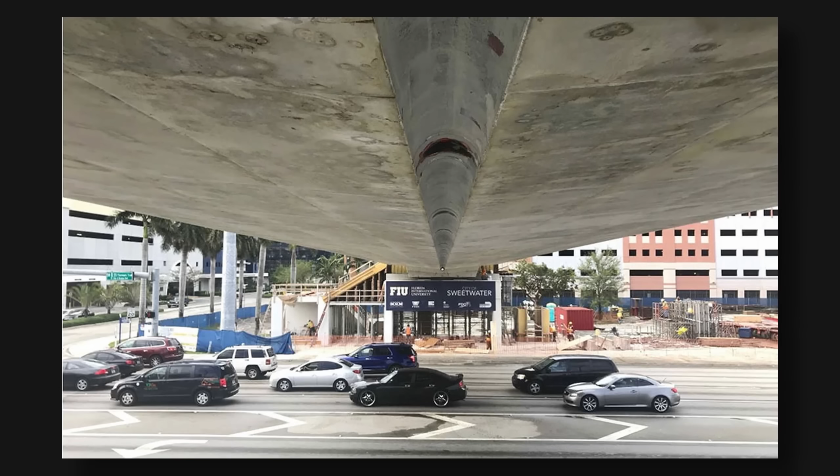In 2018, when rushing to install the FIU pedestrian bridge, improper calculations, project crunch to meet urgent deadlines, and gross negligence toward glaring red flags led to a clearly preventable tragedy that claimed innocent lives.

It was a busy March afternoon in 2018 at the intersection of Southwest 8th and East Campus Circle in Miami, Florida. Southwest 8th Street is an 8-lane thoroughfare on the north side of FIU, Florida International University's main campus.

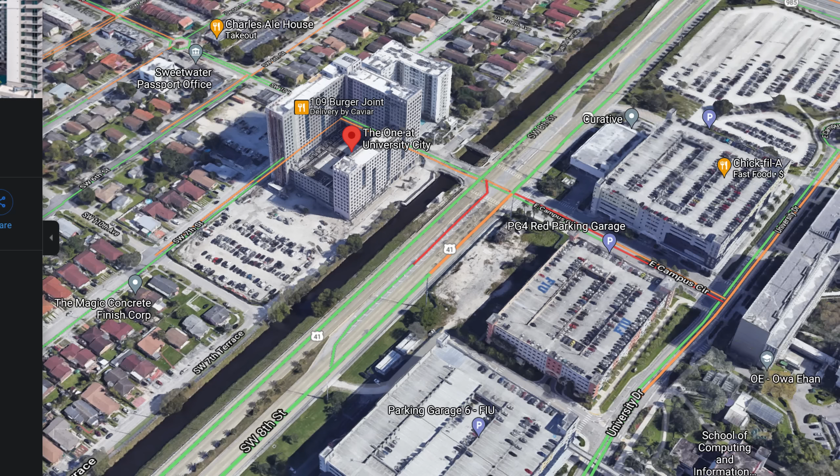This particular area was slightly congested in recent weeks, owing to construction of FIU and Sweetwater's new pedestrian overpass that would bridge the campus and the suburb of Sweetwater near 3 main parking garages on the FIU side, connecting near the newly implemented University City off-campus housing under construction just on the north side.

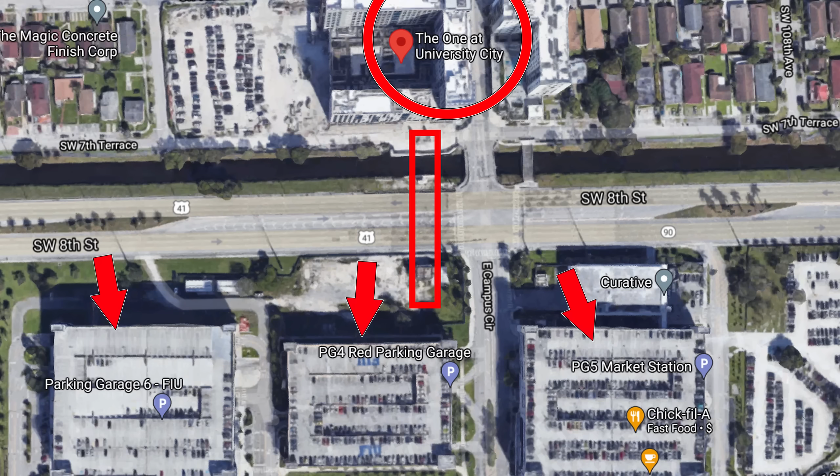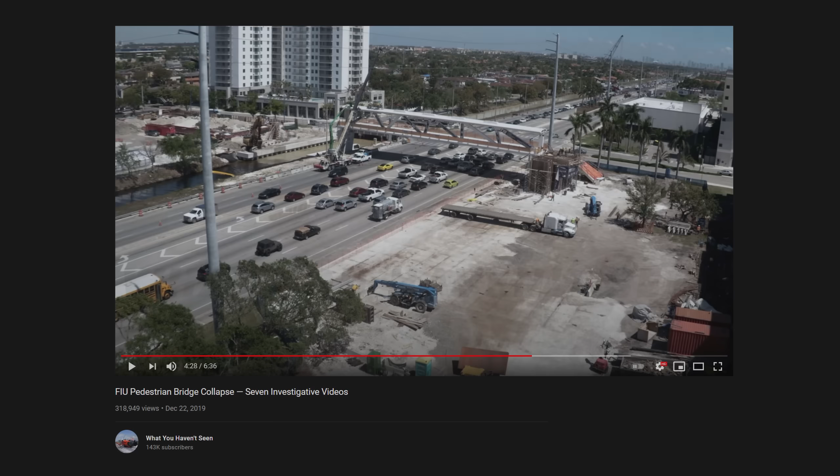The pedestrian bridge would allow campus-bound students to cross 8 lanes of traffic and the nearby canal safely and with relative ease. Also apparent was that this overpass would be a significant source of pride for FIU, Sweetwater, and their partners, evident by its truly unique design, artistic influences, and bold promotional campaigns, especially since the university is home to the acclaimed Engineering School of Construction, and specifically FIU's Accelerated Bridge Construction, or ABC, program.

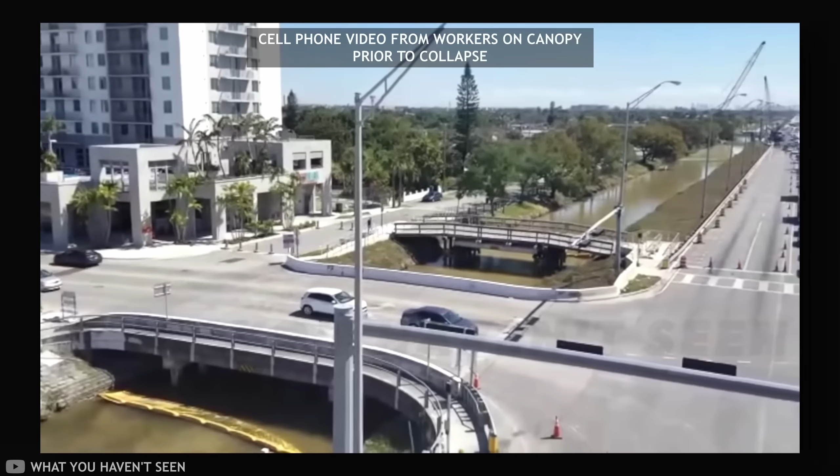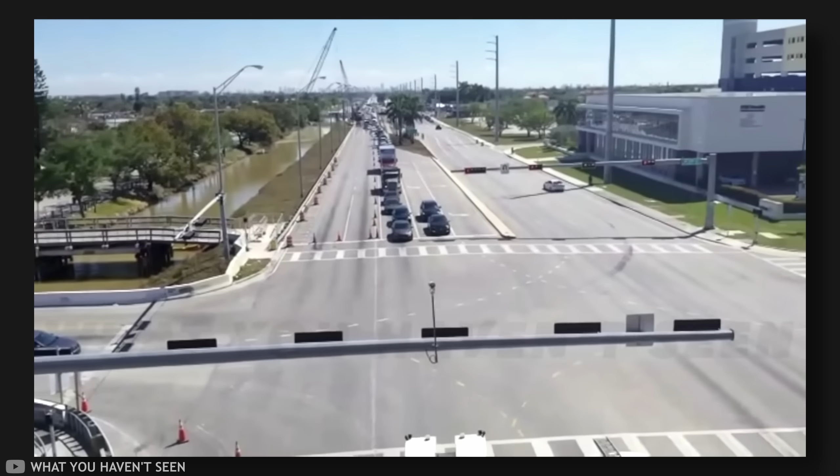Under construction but not entirely impeding traffic on Southwest 8th, the FIU pedestrian bridge project had reached a point where only 2 lanes needed to be closed for its continued work. On Thursday, March 15, 2018, at roughly 1:45 p.m., the bridge suddenly collapsed.

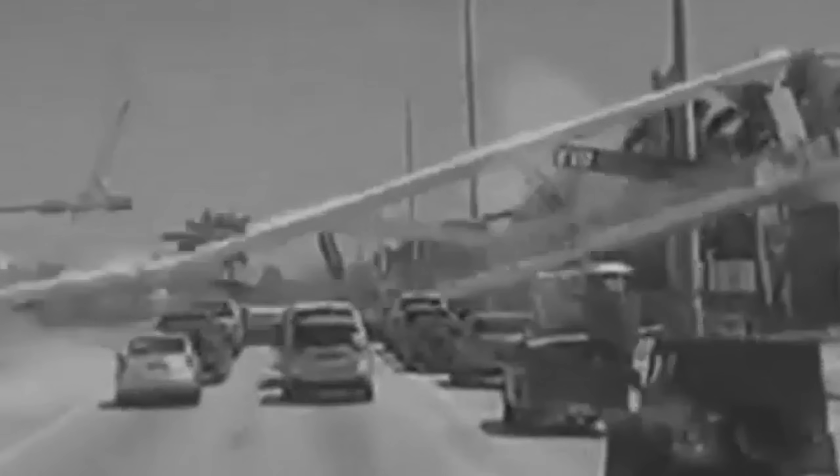Along with the 8 vehicles that it impacted, a small crew of workers had been present atop the canopy of the structure as well. This catastrophe injured 10 and claimed the lives of 6 - 5 of which were in occupied vehicles underneath, and 1 of the workers.

Ultimately designed to be a concrete truss-supported, asymmetrical cable-stayed or suspension bridge in appearance, the idea itself underwent many ups and downs over the years due to budget issues.

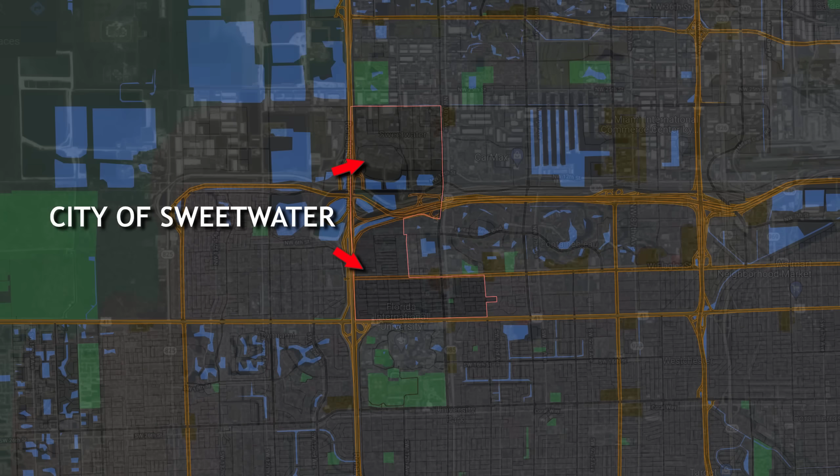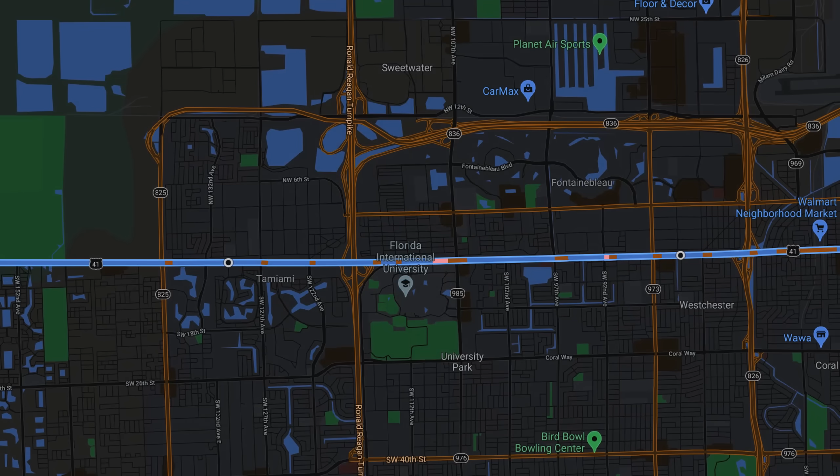The suburban city of Sweetwater, home to much of FIU's off-campus housing, is flanked by university locations - the College of Engineering to the east-northeast, the main campus directly to the south. The 8-lane Southwest 8th Street cuts right between the two and is actually Old Highway 41, the main surface road directly into and out of downtown Miami.

The volume of pedestrians needing to cross has been a well-known safety hazard for years, including 18-year-old Alexis Dale, who moved from San Diego that summer to attend the university. Sadly, one day before the beginning of school, she was fatally struck as she was crossing 8th Street and Southwest 109th Avenue early Sunday morning.

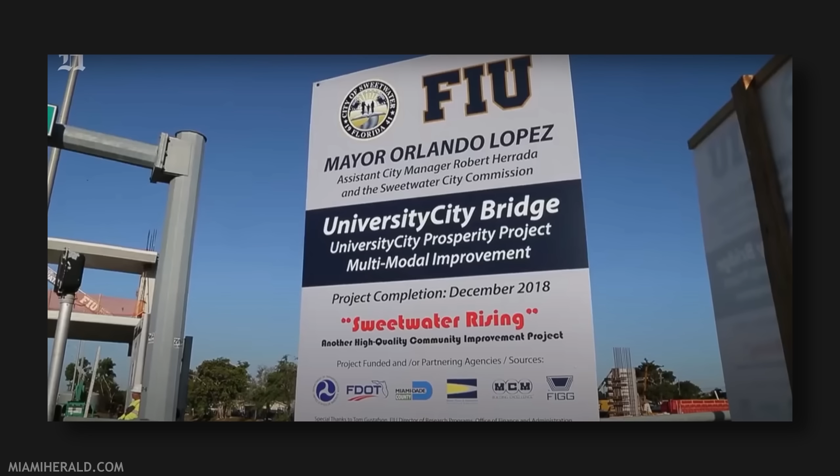Through a partnership between FIU, the City of Sweetwater, FIGG Group, and Munilla Construction Management, or MCM, the design, control, and sign-off would ultimately be down to the Florida Department of Transportation, or FDOT.

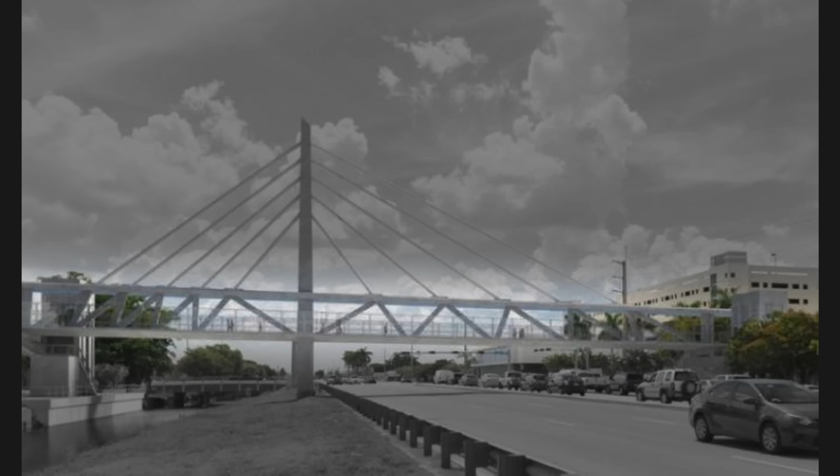This bridge was to be a 2-span, covered, non-redundant, concrete truss in its load-bearing structure, with a decorative tower above reaching down onto the roof portion, with ornamental steel pipe stays emulating the look of a cable-stayed or suspension bridge.

Asymmetrical and complex designs, though, in load-bearing structures like these are challenging and require the utmost professionalism in engineering and calculations. At a cost of roughly $12 million, the total length was 320 feet, including the stairs and landings at each end.

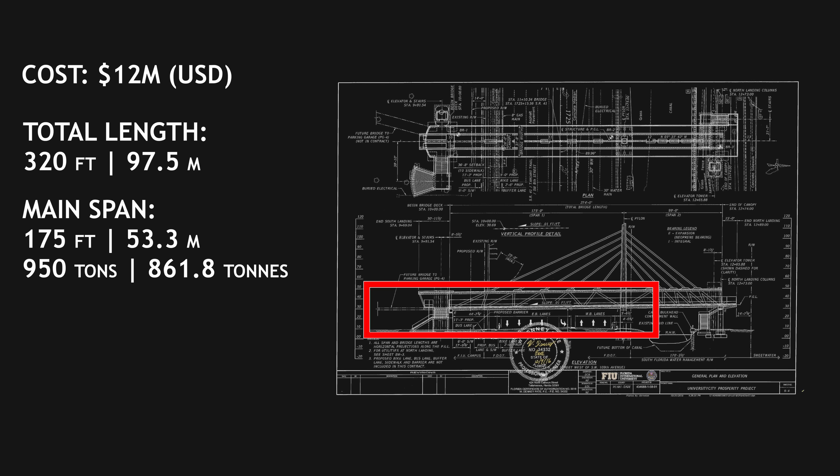The main span would weigh in at 950 tons and be 175 feet in length, to accommodate 5 eastbound lanes and 3 westbound lanes, with a walkway proposed for a later separate addition leading directly into the PG4 red parking garage on the FIU side.

Previously 11 feet shorter, a design revision in October of 2016, requested by FDOT, brought it to this length, requiring that a future eastbound bus lane be accommodated as well.

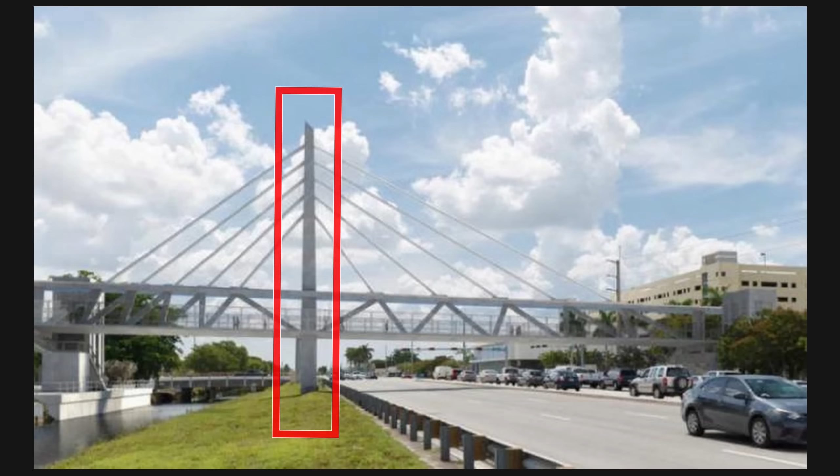The second span over the canal would be 99 feet in length, and the tower would stand at 109 feet, directly above the berm between the canal and Southwest 8th. Munilla Construction Management, or MCM, would be the primary contractor on site for construction work.

Now, important to note here is just how unique all of this was, and that's not just opinion - this was overt and intentional in the bridge's design. While concrete box girders have become increasingly common, up until recent years the concrete or composite truss bridge was extremely rare, trusses having almost exclusively been composed of steel in the past.

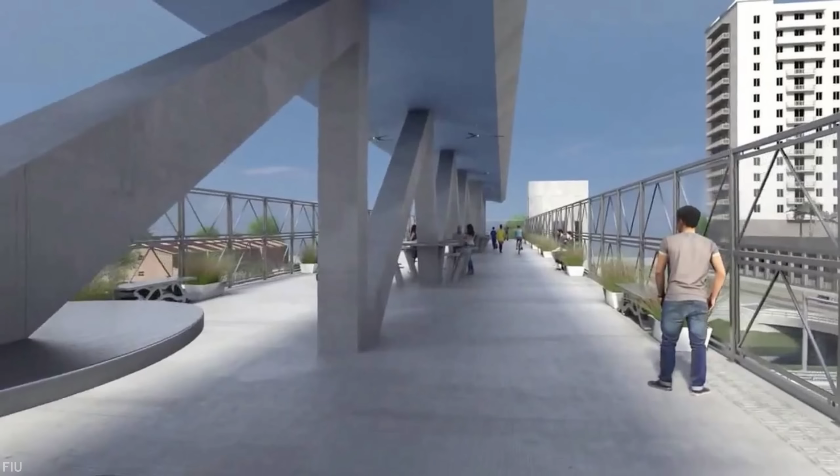The single, non-redundant, centered line of trusses, along with such a heavy canopy, were also somewhat unique. However, it was the faux cable-stayed tower as decoration that raised the most eyebrows in architecture and engineering communities, as this would be a massive amount of additional static load for the sake of aesthetics alone - practically unheard of in the world of bridge engineering at this magnitude for purely aesthetic purposes.

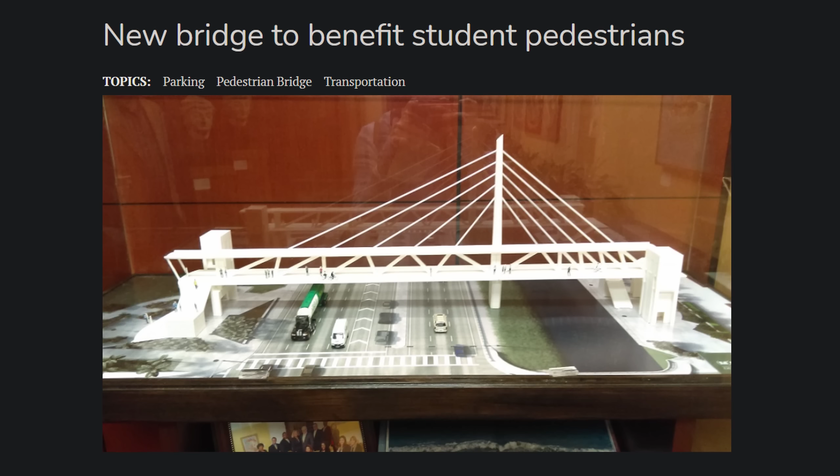Not impossible, but again, very complex and requiring the utmost professionalism in planning and design. Indeed, FIGG Group makes this the pillar of their work, something that has drawn so many customers in.

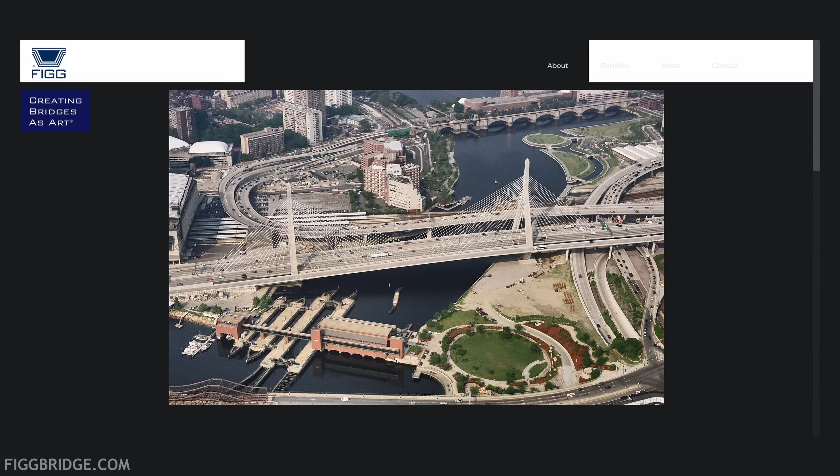Bridges as art, they call it. The concrete would be composed of the up-and-coming self-cleaning composite material that we're seeing more and more of lately, along with rebar reinforcement. This self-cleaning material is meant to keep the bridge looking fresh and new, preventing it from taking on the typical dingy gray color seen in so many older bridges.

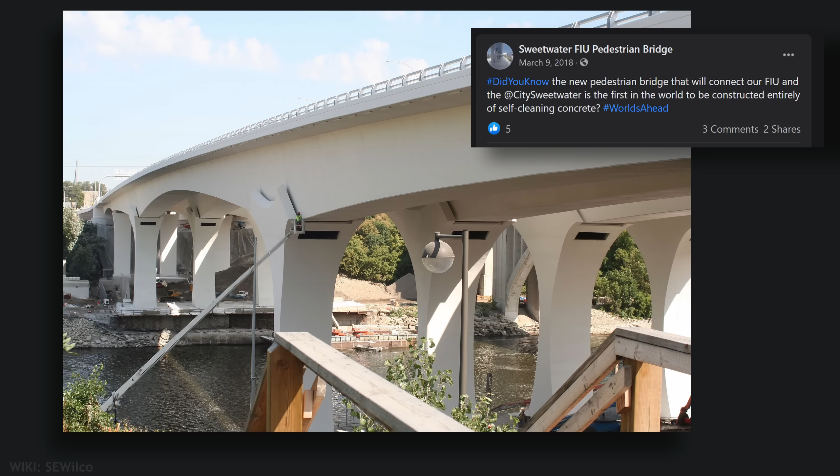Since load-bearing was fully dependent on concrete truss members, this new self-cleaning composite would be the primary structural element, aided only by rebar, and would no doubt be put to the test here.

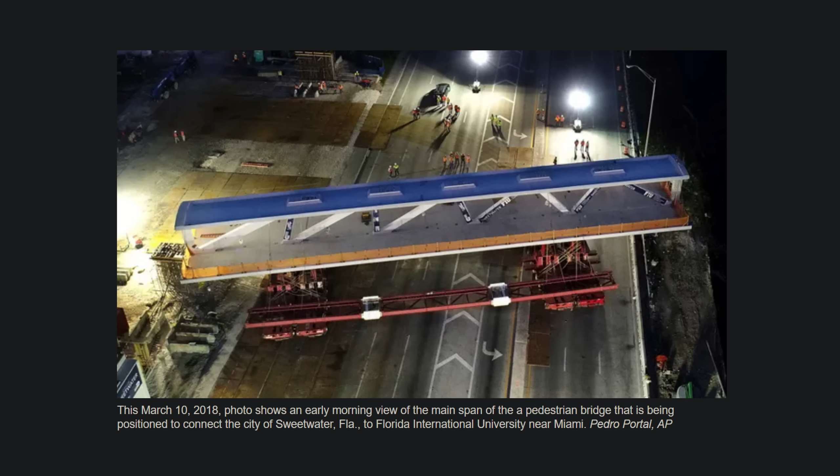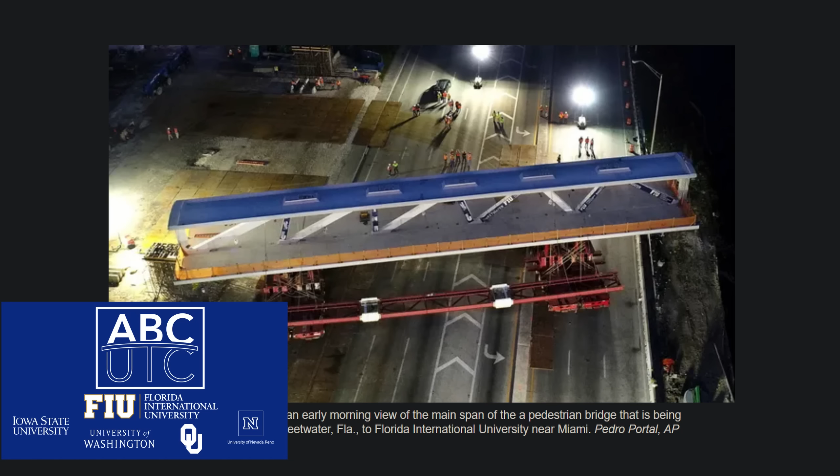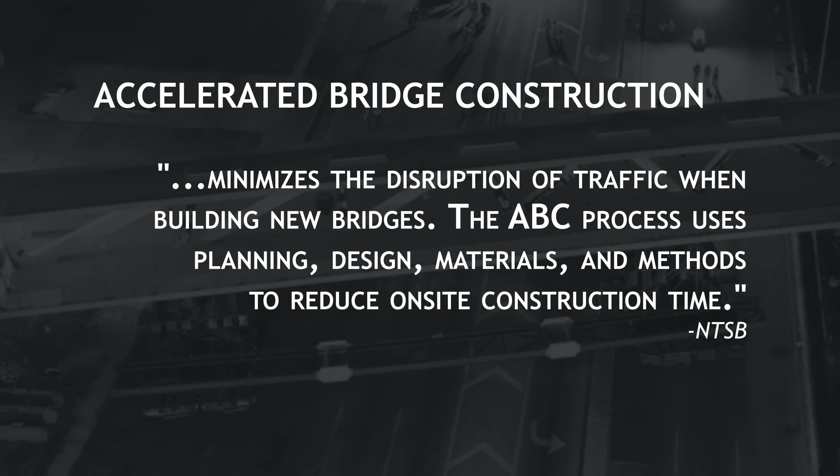Finally, the main span would be assembled and transported into place under the Accelerated Bridge Construction Program, or ABC, a program that FIU prides itself on, even to this day. This meant via this revolutionary ABC program and its innovations, the process would seek to minimize the disruption of traffic when building new bridges. The ABC process uses planning, design, materials, and methods to reduce on-site construction time.

It's safe to say that with the volume and frequency of pedestrians crossing such a busy street, it begs the question, why has this not been more of a priority in general for the local municipalities here?

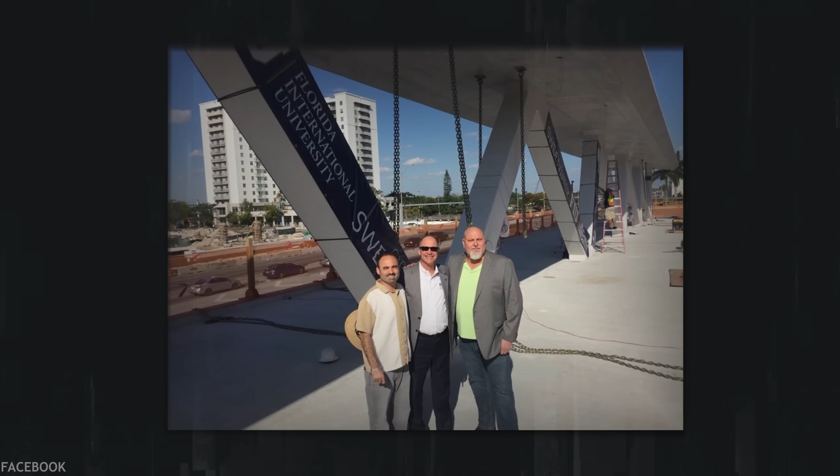As with most disasters of this type, it's rare a single cause or single party is to blame, and this particular collapse, in fact, served as a stark example in a chain of failures and the arrogance of groupthink, modern times and current year argument being no exception, and providing no immunity to this fallacy.

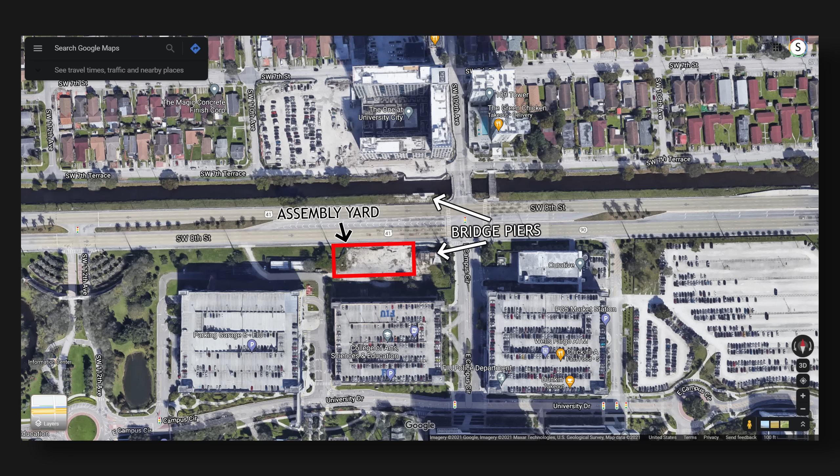Initial construction would take place in an assembly yard parallel to Southwest 8th on the FIU side of the road. The two main bridge piers that would hold each end of the main span would receive highest priority to both assemble and get put in place. The goal being as little amount of road closure as possible, and the ABC process is what drives the majority of an operation like this.

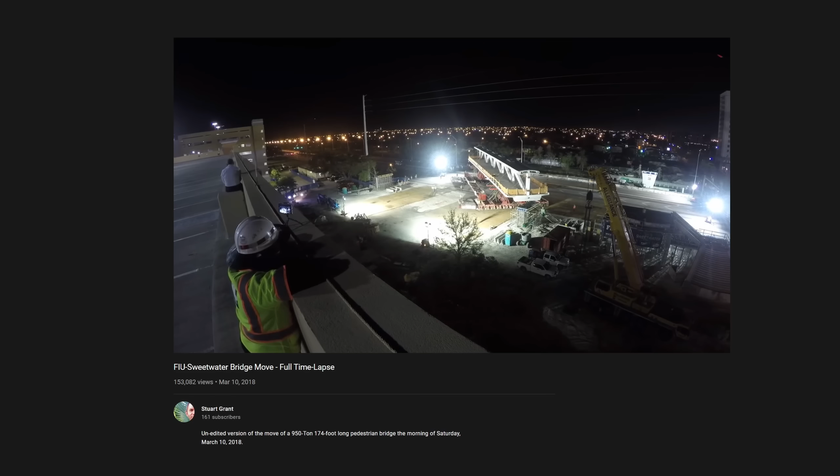Assembly nearby on false work, instead of spanning across the road obstructing traffic, then transporting the main span, in this instance, swinging it into place with the use of SPMTs, or self-propelled modular transporters.

As with many aspects of bridge construction though, this is obviously much easier in concept than in practice. The process of moving an assembled structure this heavy as a single unit, even just a few feet, let alone rotating its orientation, changing the lifting points, the leveling of its plane, etc., is meticulous, time-consuming, and puts severe strain on it, even under the best of circumstances.

The goal, once the concrete sets in a bridge like this, and of this particular portion, is to have all load-bearing members under what's known as compression. Concrete is notoriously weak under tension, but much stronger under compression.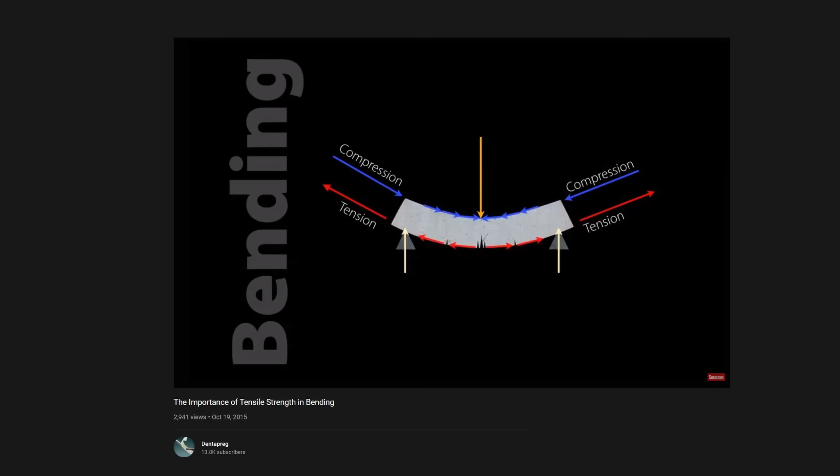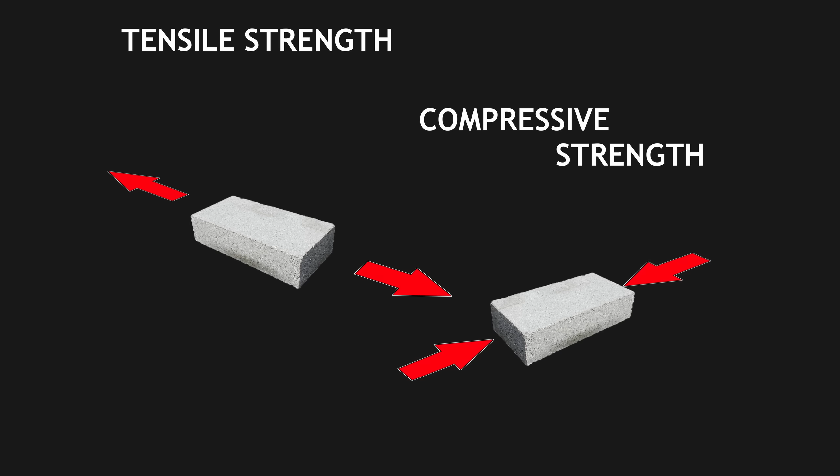With the concrete now under tension, it's much more prone to cracking and giving way. The same applies when pulling the concrete, another form of tension, like pulling on a spring instead of compressing it. This is known as the concrete's tensile strength, and while much lower than its compressive strength, these factors must still be calculated and well understood, even when its primary purpose will be to undergo compression for most of its life.

As assembly and casting neared completion in the yard atop the falsework, as expected, compression and tension were not in equilibrium. Along with the rebar skeleton inside each concrete member, each truss also contained what's known as post-tensioning rods. These rods allow crews to increase or release tension in each, bringing them into the desired condition for the application. In this instance, every member in compression being the goal.

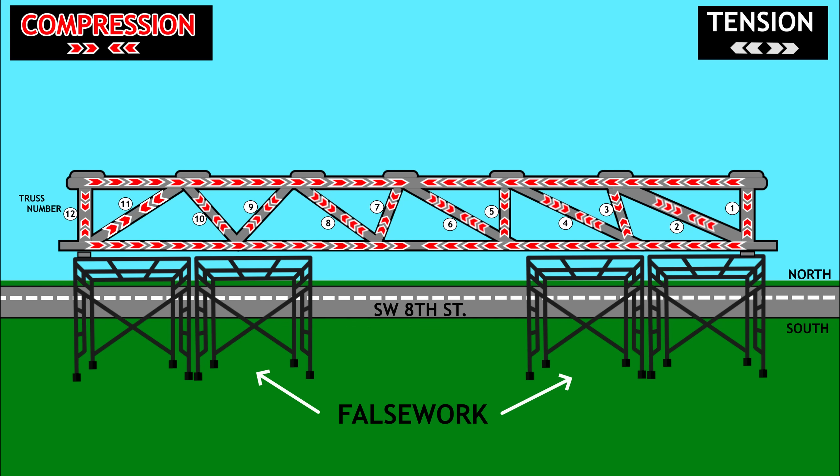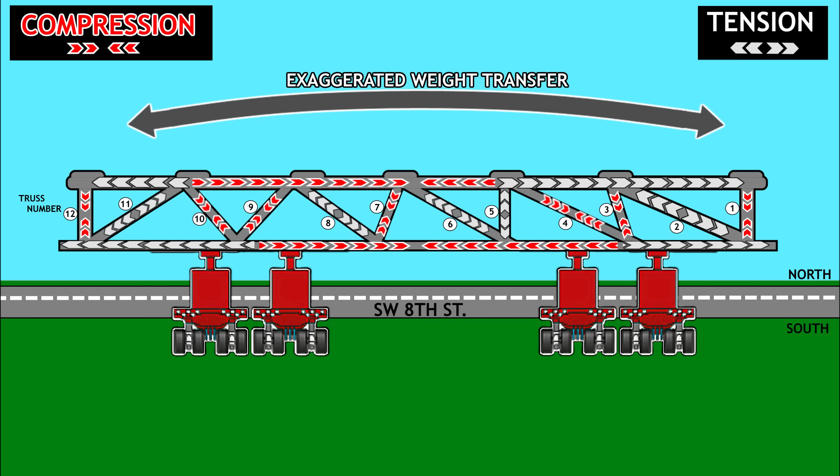With each truss member and their respective joints or nodes in equilibrium atop the falsework now, it was time to lift the structure onto the SPMTs. The kinematics of these new forces meant equilibrium would be lost again. The bridge being lifted onto transports from a different position meant post-tensioning would be reapplied, bringing them back into a state of compression inside design tolerances.

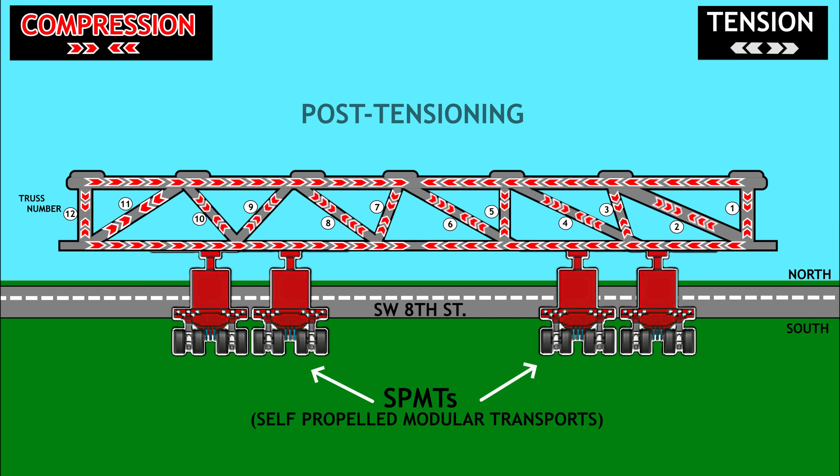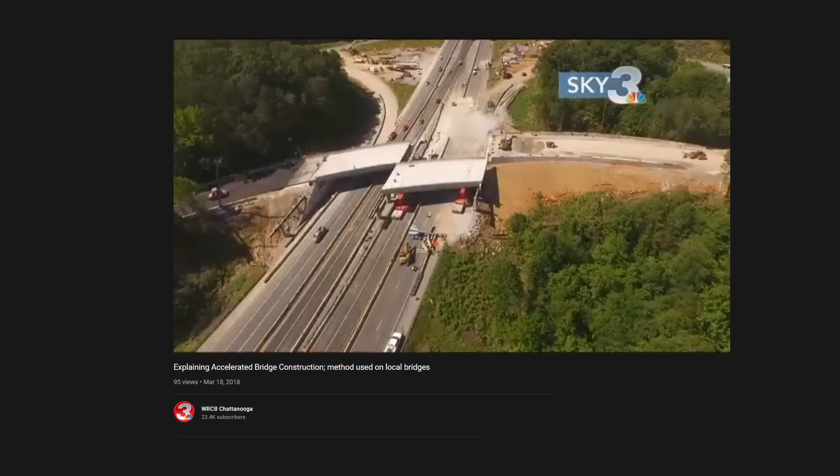Transport would be carried out quickly though. As a matter of fact, while the ABC process has gained popularity in the last decade or so, the FIU bridge was to be an example of this portion being carried out in seemingly record time. The bridge in Georgia took several months to build, then about 60 hours to move into position. The one in Florida took just 6 hours.

While it's gained popularity and slowly become commonplace, especially to replace older interstate bridges reaching the end of their lifespan, accelerated bridge construction is incredibly nuanced, and forces must be factored in that quite possibly would have never been considered in the past when building a bridge affixed in place.

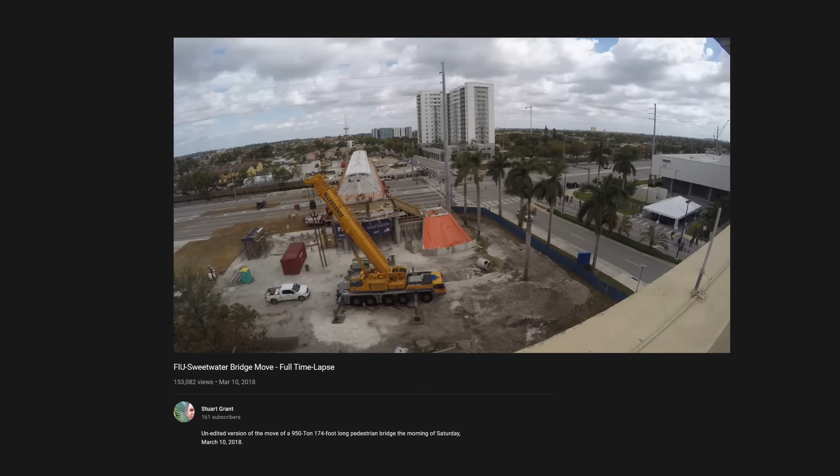With the SPMTs in position, it was time to lower the main span onto the bridge piers. However, the piers would also be fitted with shim stacks, spacers essentially, to temporarily hold it up slightly higher than setting it straight down onto the piers themselves.

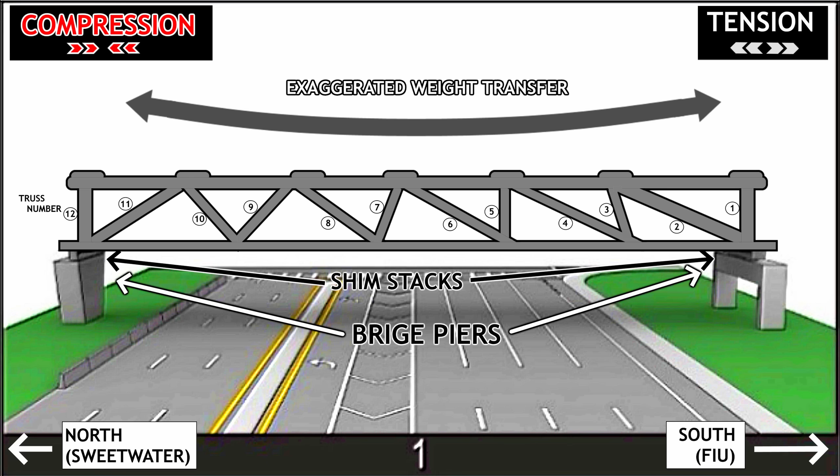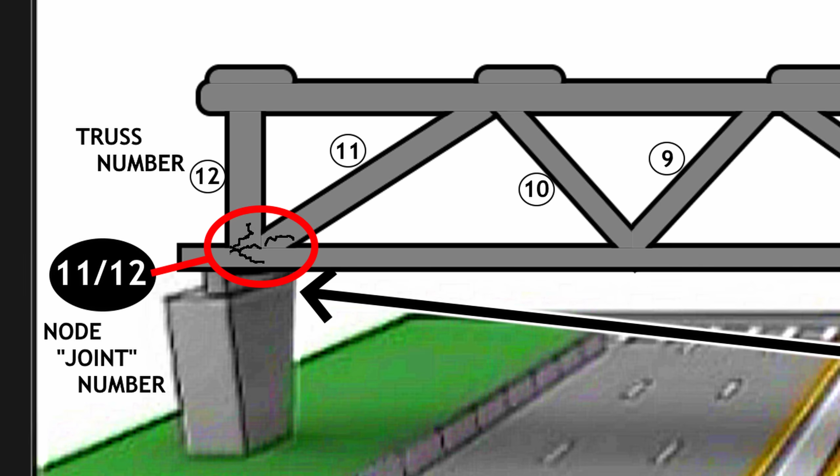With this structure now out of equilibrium again, post-tensioning would take place to bring all members back into compression. Cracks had appeared though, causing a loud distinct sound heard by workers in node 11-12, the joint where truss members 11 and 12 intersect, during assembly atop the falsework, 19 days prior to this on February 24th.

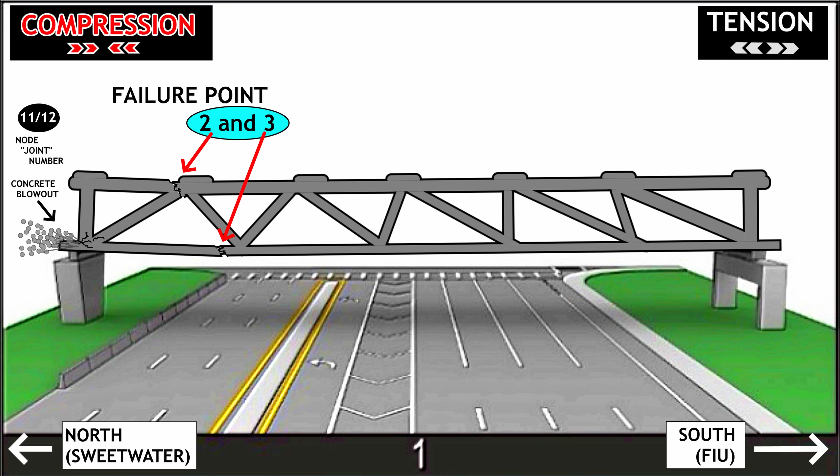These cracks continued to spread, visibly worsening, documented closely by several managing parties involved, until, during more tensioning operations atop the canopy, the concrete at node 11-12 blew out entirely, the first failure point, followed near simultaneously by failure points 2 and 3 and the subsequent instant collapse onto the road below.

These events began well before the assembly yard though, and to understand it, we'll need to dig deep and go back 16 months, back to the drawing board, so to speak.

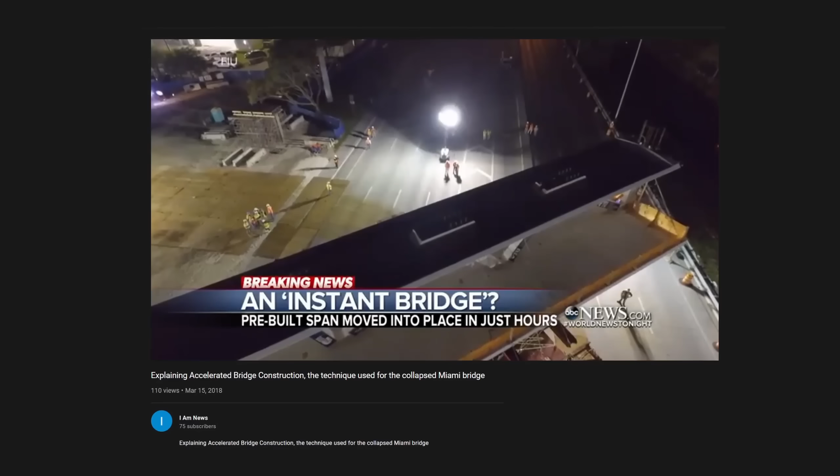We've already communicated to the developer that to speed up the bridge. It's called Accelerated Bridge Construction, or ABC for short. Some dub it an instant bridge. Speed up the bridge and worry about the streets and the plaza afterwards.

Now, keep in mind this sequence of cause and effect was only put together after a painstaking 19-month-long official investigation by the NTSB and their partners, which even then was drawn out beyond this due to complications with major parties involved in the bridge attempting to effectively absolve themselves of any wrongdoing at every turn.

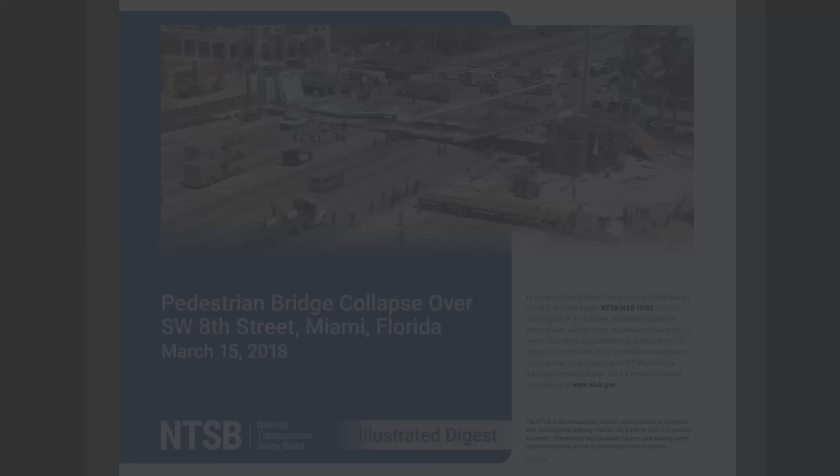This digest here, for example, by the NTSB, was published as recently as February 2021, a follow-up report to the official HAR 1902 report from October of 2019.

When designs of this nature are drawn up, it's common practice for them to undergo an independent peer review. Essentially, third-party consultants in the field certified to evaluate calculations, load-bearing capabilities, and other related engineering checks to ensure drawings and plans meet specifications and requirements for planned use.

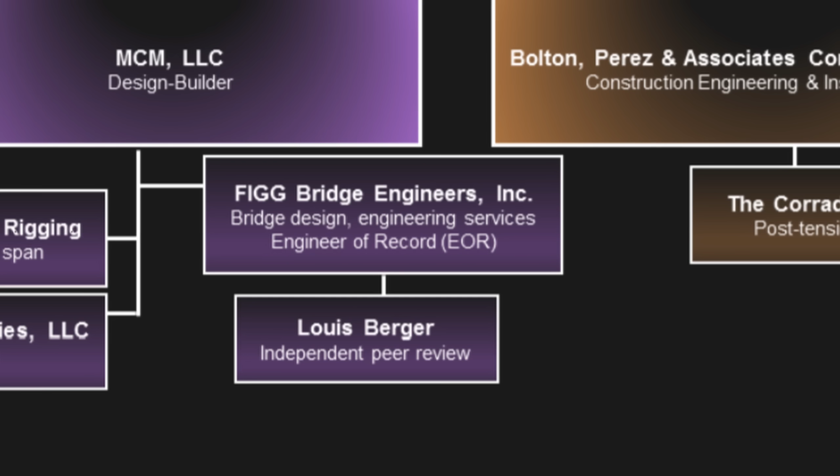FIGG Bridge Group, the engineering firm of record, would bring on Louis Berger and Associates for this quality control process. However, investigators found out the Louis Berger firm was not qualified by the Florida Department of Transportation for this type of complex bridge certification, and being the final say-so in a project like this, FDOT should have independently verified this information before signing off.

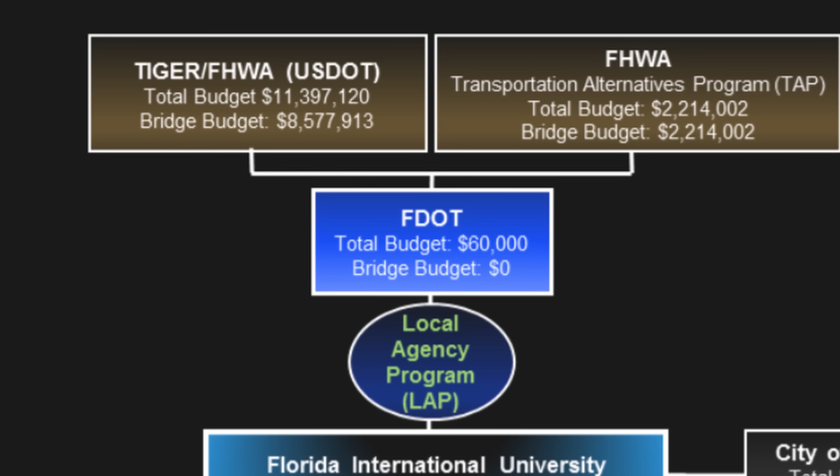A similar process also takes place once construction commences, and third-party engineering consultants will be present on the job site to administer, monitor, and inspect as construction proceeds. Munilla Construction Management, the firm hired by FIU for the construction work on site, would bring on third-party Bolton, Perez, and Associates consulting engineers for this task.

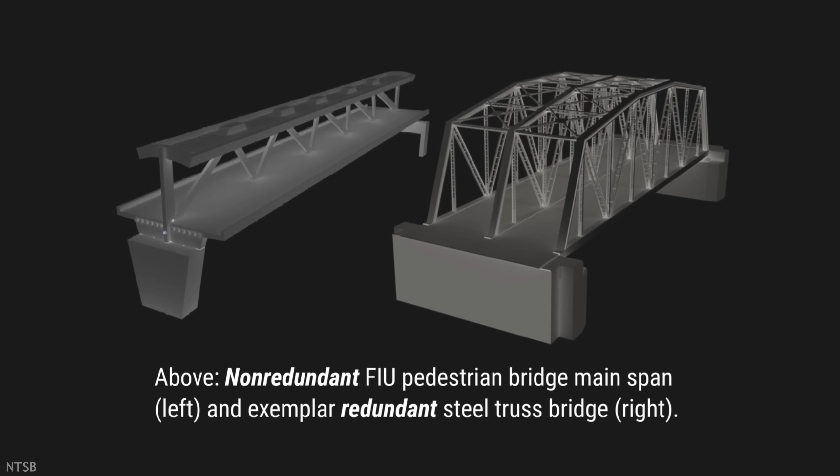FIGG Bridge Group's designs were non-redundant, providing only a single load path, meaning essentially if one member fails, total collapse is likely to follow. Not entirely uncommon in the world of structural engineering.

However, FIGG was creating this design based entirely and almost unbelievably on the fact that they erroneously considered this structure to actually be redundant, and had created their calculations and needs for load-bearing capacity on this false factor of redundancy. A bridge this unique with one single row of trusses, not even trusses on either side like most bridges, what path was the load to take if a member broke?

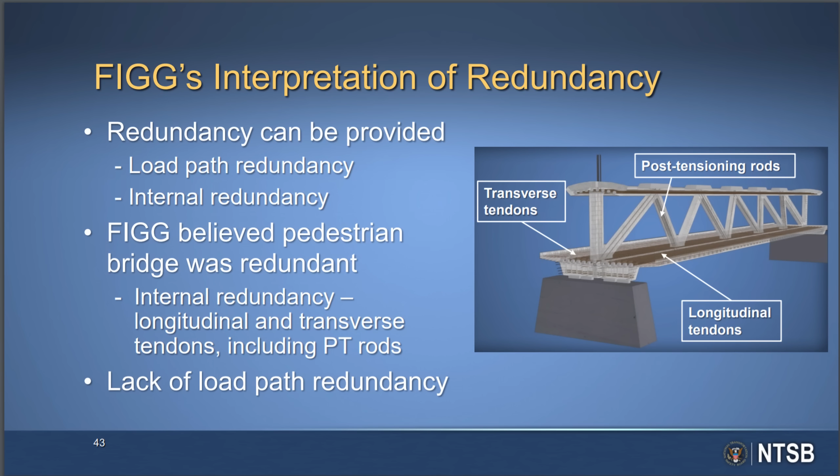The level of incompetence here is infuriating.

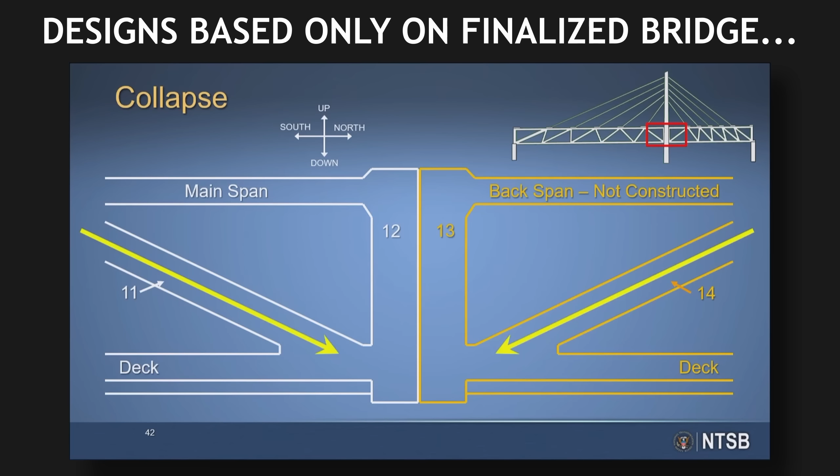In addition, and just as crucial to the chain of failures, the Louis Berger firm was found to have not conducted any evaluations for conditions other than the finalized, fully assembled version of the bridge.

The Louis Berger engineer told investigators that, 'My model was for the structure as one structure. Doing construction sequence staging analysis was not part of our scope. And again, doing such an analysis requires much more time than what we agreed about,' referring to FIGG Bridge Group.

In a post-collapse interview, the Louis Berger engineer stated, 'In the beginning, I suggested to do this kind of analysis to analyze the connections. I'm talking about the nodes, or the joints, to analyze the connections. However, the budget and time to do this actually was not agreed upon with the designer.'

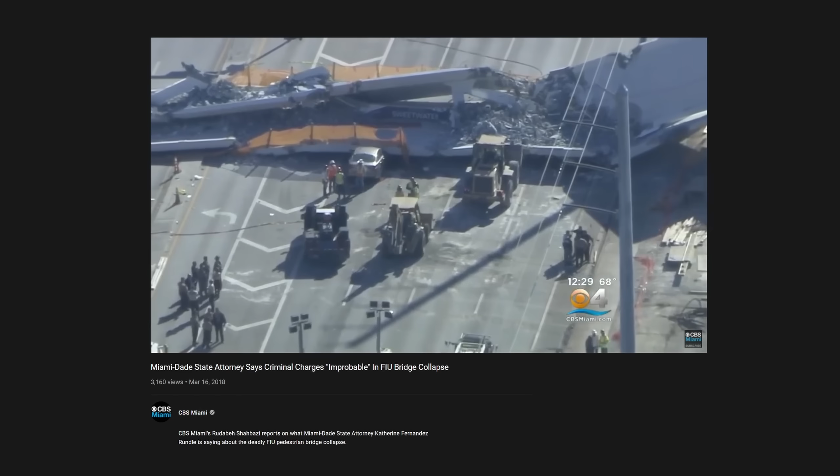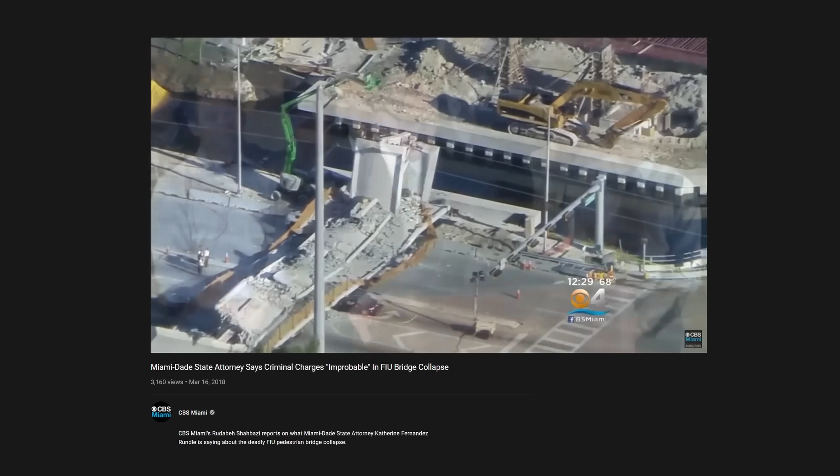The university says it followed all processes and procedures. FIU's president on Thursday confirmed that there were tests conducted on the bridge. I have not spoken directly with Munilla Construction, but I'm satisfied that the testing that was occurring was consistent with best practice.

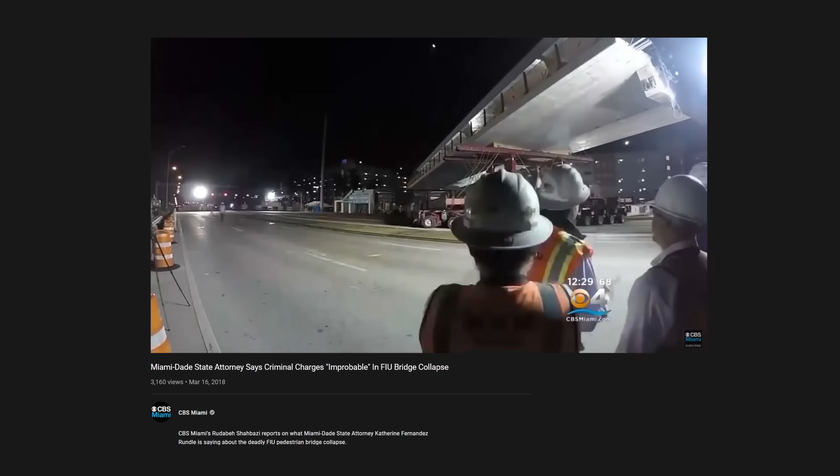Miami-based family business Munilla Construction Management partnered with FIGG Bridge Engineering and a secondary engineering firm, Louis Berger Group. We followed all processes, competitive bidding, two-phase process, independent engineering company that is fully certified by the state, that was recommended to us by FDOT.

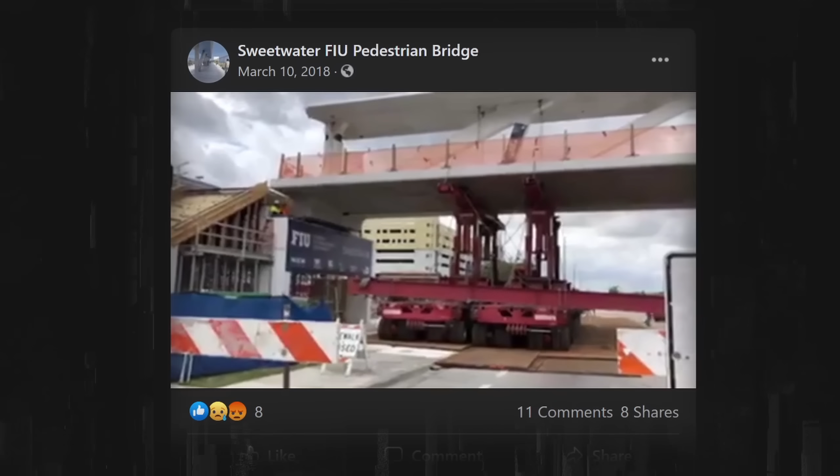Tolerances had not been factored in for the atypical stress put on any of these pieces during the ABC process. On top of this, since FIGG's designs were inadequate even aside from factoring in the ABC process, it should have been glaring to a firm like Louis Berger to catch at least this under-engineered final design, as that's the purpose of such a peer review process.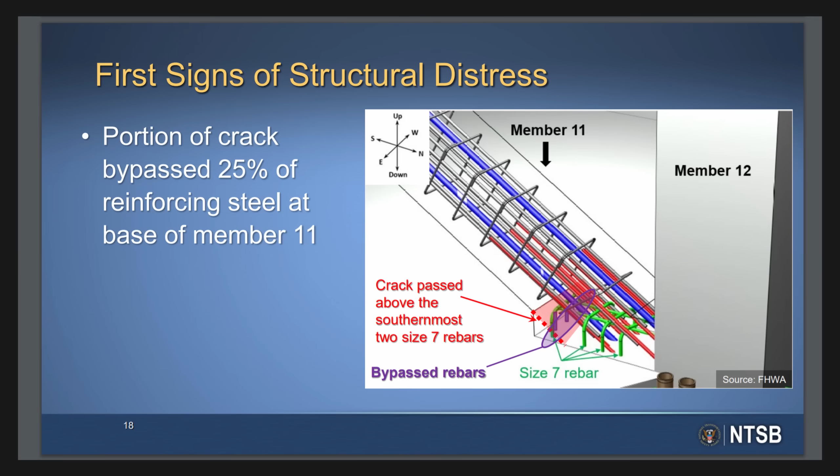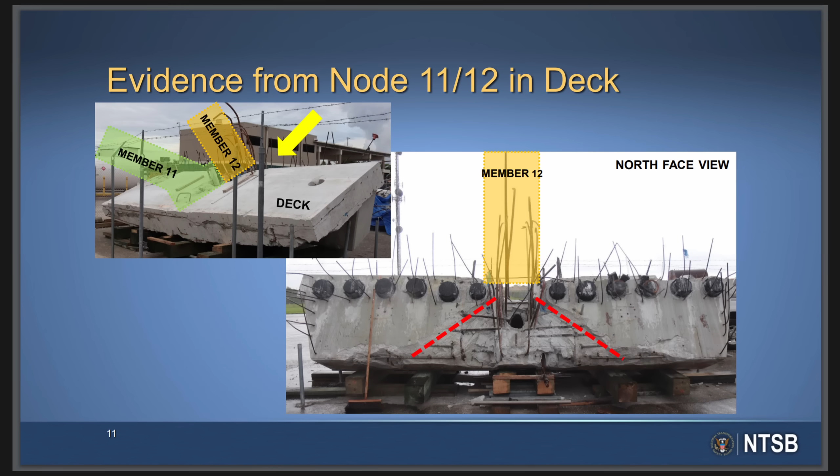Since FIGG's calculations were so erroneous and upcoming forces remained so underestimated, nodes 1, 2, and 11, 12 would be so pathetically under-engineered, containing non-structural voids, essentially empty, wasted space within the concrete, and such insufficient rebar that it was inevitable cracking would occur almost immediately once the concrete had set in the assembly yard. And this is exactly what happened at node 11/12.

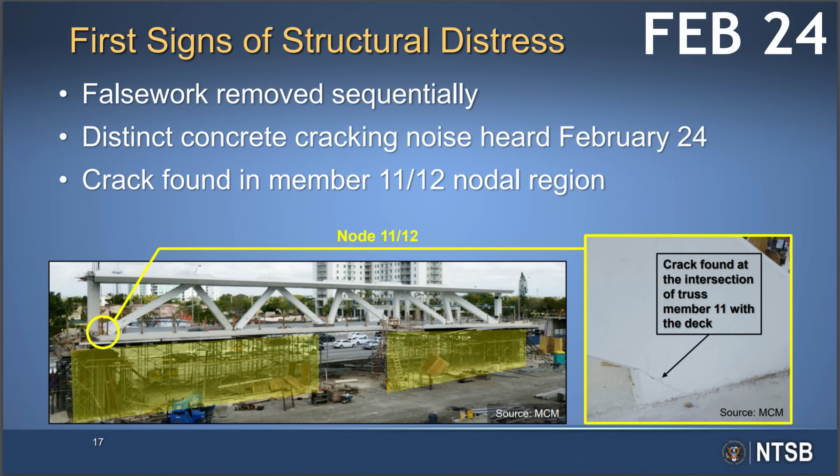As frustrating as it is, this cracking was closely monitored and well documented over a period of 2 to 3 weeks. February 24th, a loud, distinct sound of cracking is heard from node 11/12 as tensioning is finished and the falsework removal process begins.

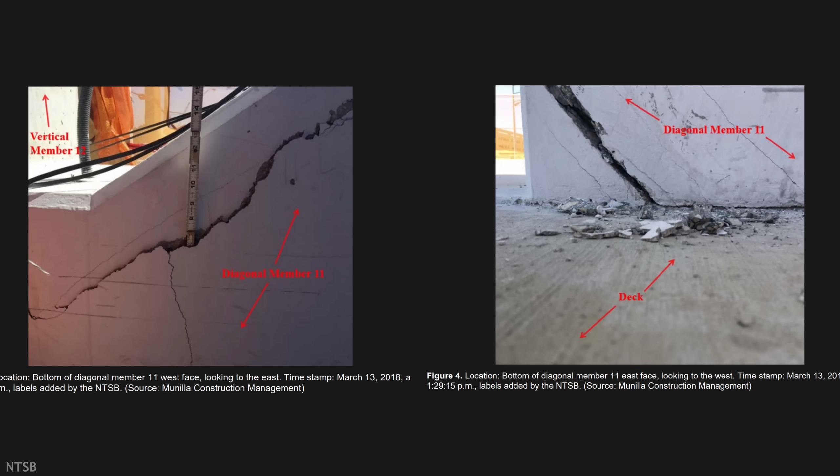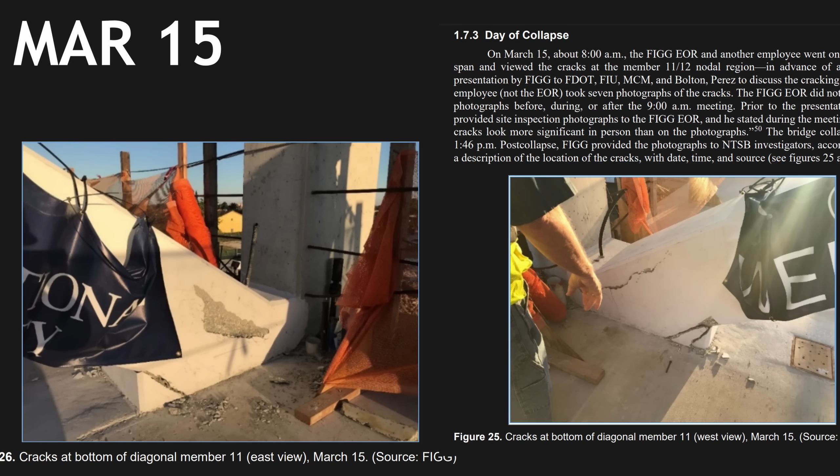March 10th, the SPMTs begin to move the main span, and over the next few days, during movement, detensioning, and placement onto the bridge piers, the cracks evolve significantly from what appeared as concerning originally to beyond alarming. By March 13th, reaching a depth of 2 to 3 inches now, and spreading rapidly all around the 1112 joint region. This could and should have easily been identified by those in the industry as the 1112 joint beginning to dislocate entirely from the bridge deck.

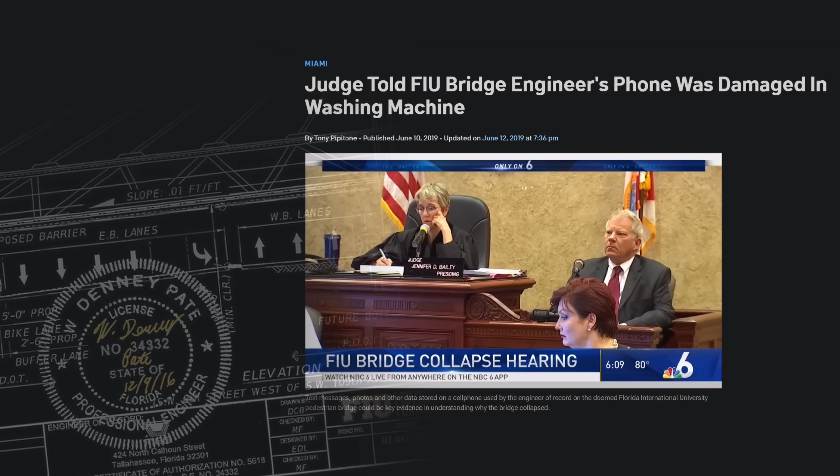Denny Pate, the one whose stamp of approval appears on the drawings, the primary engineer of record, and FIGG Group vice president, was instrumental in pushing the narrative to all parties that these cracks pose no issue.

Hey Tom, this is Denny Pate with FIGG Bridge Engineers. Obviously some repairs or whatever will have to be done, but from a safety perspective, we don't see that there's any issue there.

Pate then headed to Miami, and on March 15th, the day of collapse just a few hours prior, after viewing the cracks in person at 8 a.m., would hold a meeting at 9 a.m. with FIU, FDOT, MCM, Bolton Perez, and the rest to assure them there was nothing to be concerned about, at which time no parties expressed any desire to halt the work or close the road underneath the 950-ton now crumbling span.

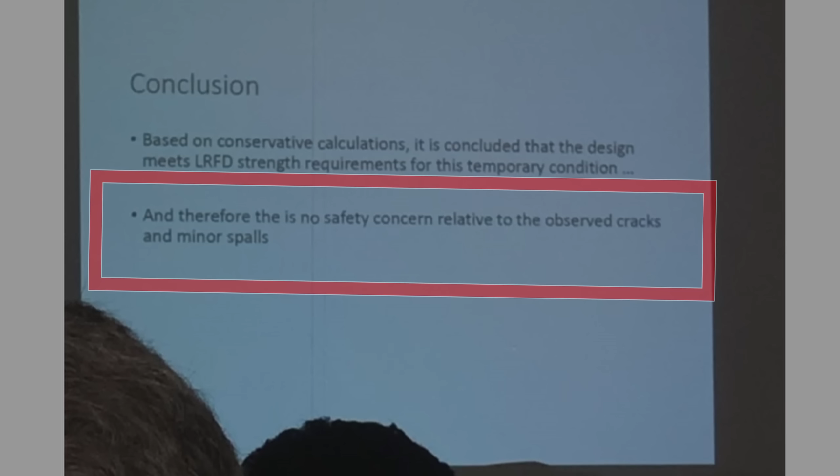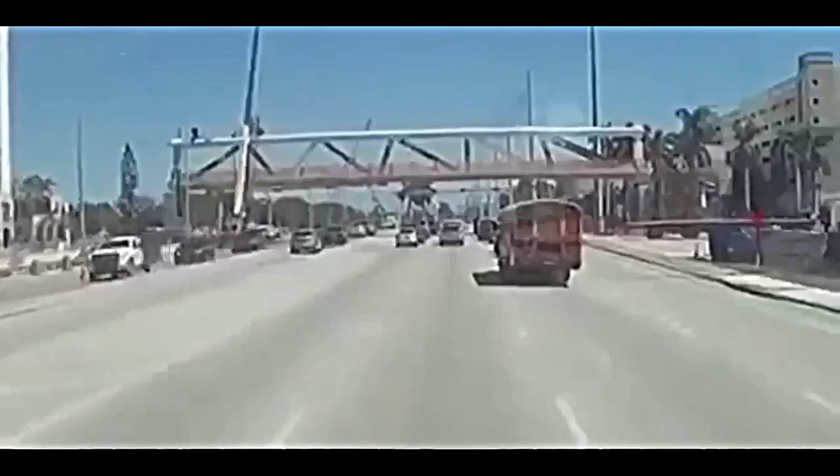The decision was made instead to send workers up on the canopy in an attempt to re-stress member 11 using the post-tensioning rods. This decision was of course futile and grasping at straws by those in charge, as the cracking from the very beginning, to an engineer who gives a damn, should have been a message, a warning, the bridge screaming that it was already doomed to give way. The collapse took place that same afternoon during the re-stressing procedure.

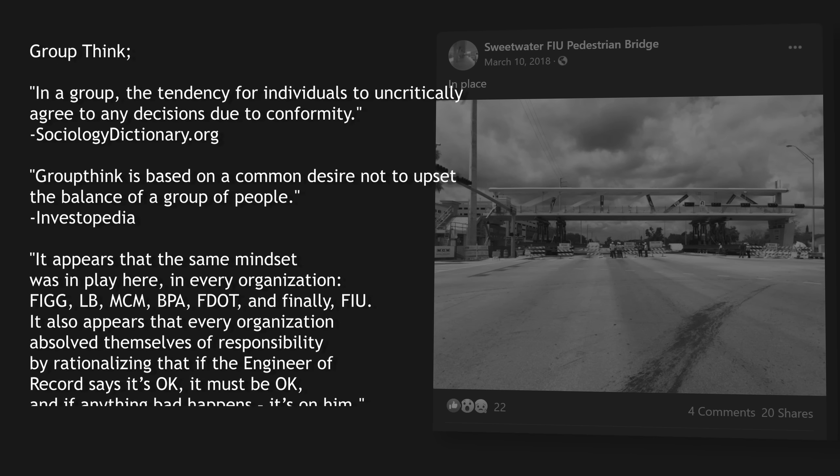Groupthink: in a group, the tendency for individuals to uncritically agree to any decisions due to conformity. Groupthink is based on a common desire not to upset the balance of a group of people. It appears that the same mindset was in play here, in every organization: FIGG, Louis Berger, MCM, BPA, FDOT, and finally, FIU. It also appears that every organization absolved themselves of responsibility by rationalizing that if the engineer of record says it's okay, it must be okay, and if anything bad happens, it's on him.

MCM was eventually forced to restructure, and along with Bolton Perez, both were fined, albeit minimally. FIGG Group was fined most heavily and ended up debarred, removed, and disallowed from future Federal Highway Administration projects, which, from what I can find, they're continuing to appeal in court. They were also recently removed from the Houston Ship Channel project, a project they spotlighted heavily on their website, and from what I can find, updates on their site stopped around this time, and the website's copyright mark even shows 2020 still. A settlement of $103 million was shared with the families of the 10 injured and 6 lost.

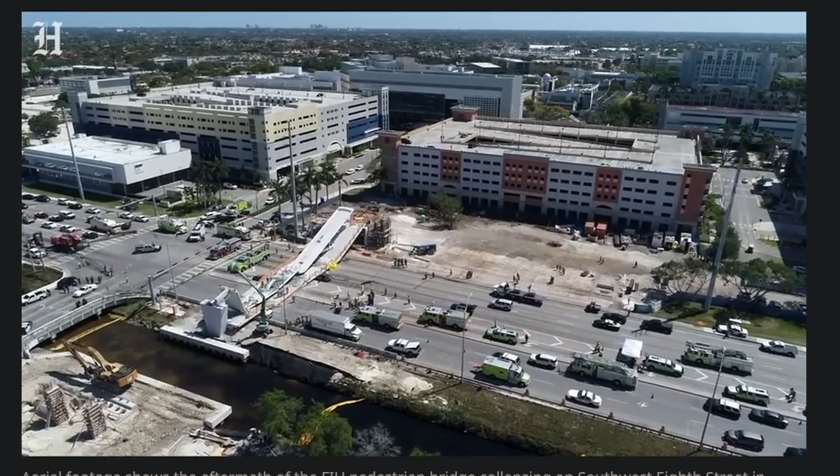From NTSB Vice Chairman Bruce Landsberg: despite the public's anger, distress, and disappointment, none of the responsible organizations had any intent for this tragic event to occur or to cause any injury or loss of life. Sadly, good intentions do not substitute for competence and diligence. Once the cracking became evident, not one of the organizations involved was willing to take the essential and unpopular step to call a halt and close the road.

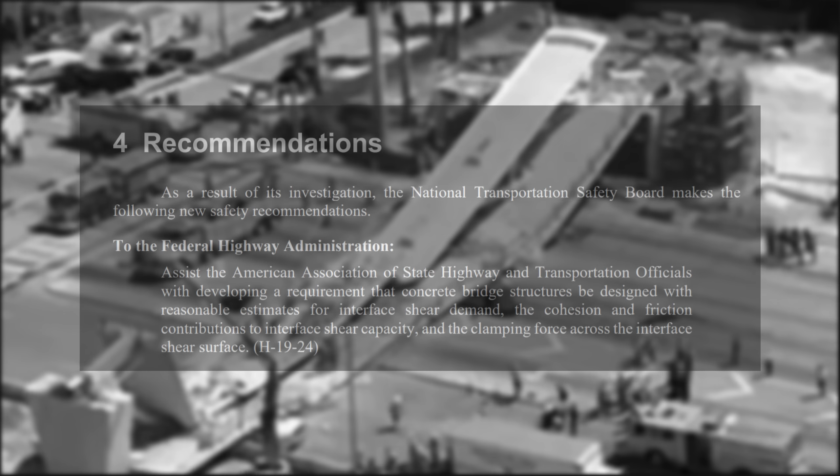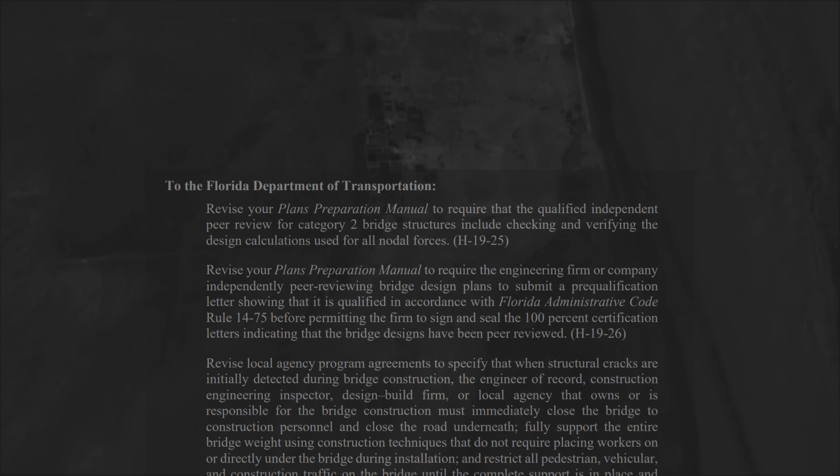The human failing that affects all of us is complacency. It is not a term the NTSB uses often, but in my opinion, it's present in nearly every accident and crash. It is my fervent hope that the organizations involved will take the NTSB recommendations seriously and quickly implement them. The lives lost and the families disrupted deserve at least that much.